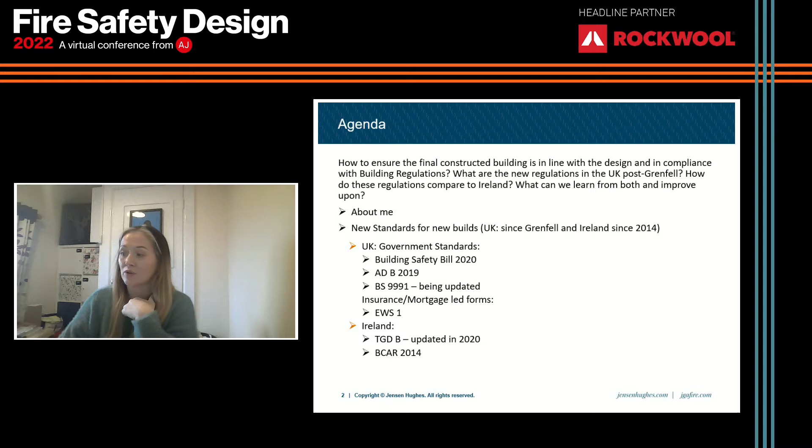So we've had an update to our Technical Guidance Document B. That is basically our ADB, except for a few slight differences throughout. I'll also go through our Building Control Amendment Regulations from 2014.

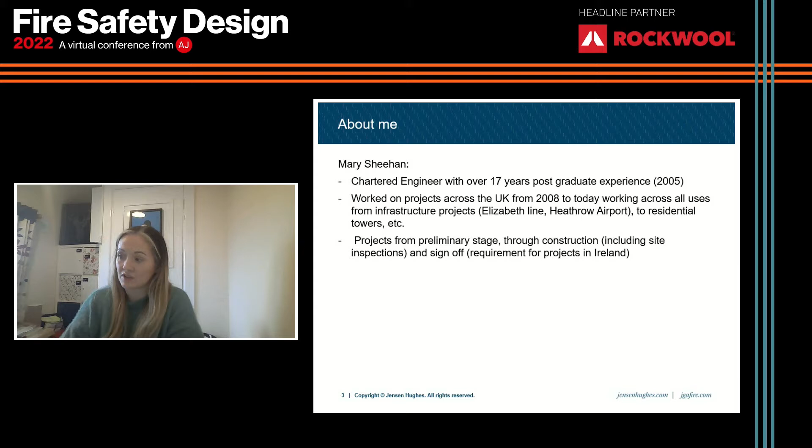A quick bit about me. I'm a chartered engineer with over 17 years postgraduate experience. I worked in the UK from 2008, and still do today, on various uses from infrastructure projects to residential towers. I've done the same in Ireland, the Middle East, and also worked in Rio on their metro for the Olympics. In Ireland, since 2014, there's been a change regarding the roles and responsibilities of fire consultants, which I'll go through, meaning on projects in Ireland you go from the preliminary stage through construction, including site inspections, and have to sign off on compliance.

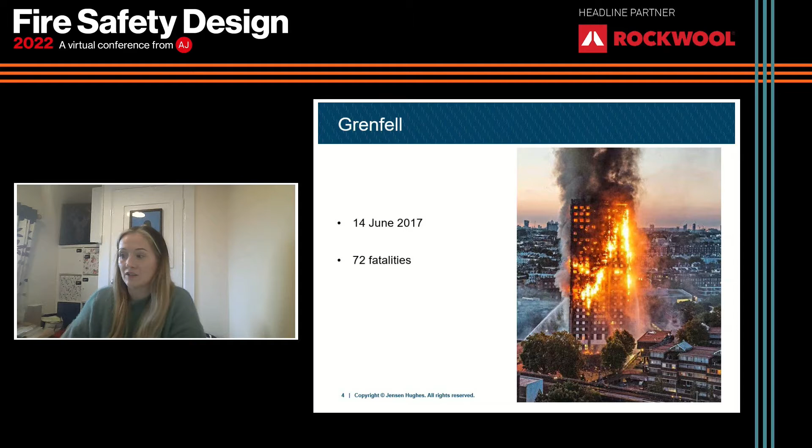As we all know, Grenfell happened on the 14th of June 2017, with 72 fatalities. As a result, the Hackitt Review came out. I'm not going to go through all these slides, but there are a number of main things that came out of it, due to lack of competencies, ignorance, indifference, and so forth. That's kind of led us to where we are now.

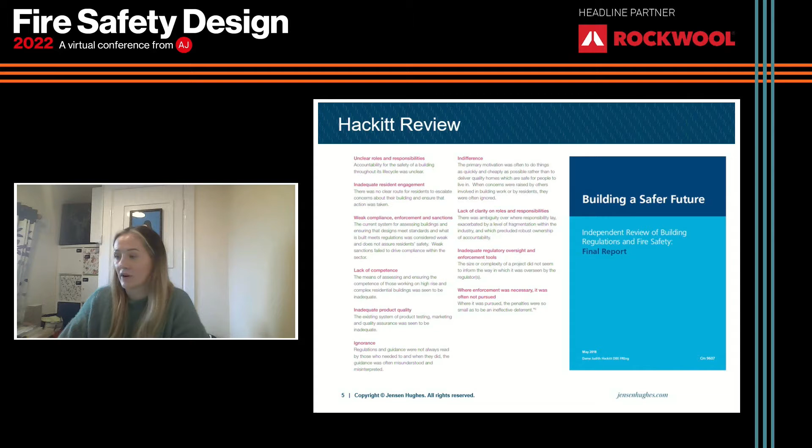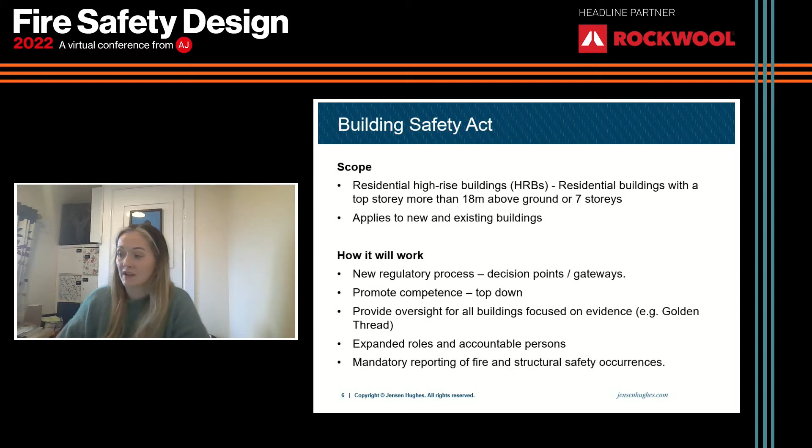So the first thing I'm going to go through is the Building Safety Act. The scope is to do with residential high-rise buildings - residential buildings with a top story more than 18 metres or 7 stories high - and it applies to new and existing buildings. There's a new regulatory process, with distinct decision points and gateways that have to be met. It's there to promote competence from a top-down perspective, provide oversight for all buildings focused on evidence, giving us the golden thread, expanded roles and accountable persons, and mandatory reporting of fire and structural safety occurrences.

It was granted royal assent in April 2022. Gateway 1 is with us now, and deals with the planning stage - the introduction of fire statements within the planning stage, just to ensure fire safety has been considered at that stage. Gateway 2 and 3 are likely towards the end of 2023.

Gateway 2 is before construction can commence. Clients have to submit a building control approval application to the regulator. This includes arrangements to capture and maintain the golden thread information. The regulator has so far spoken about a 12-week period to approve or reject that application.

Gateway 3 is after construction, which is to provide assurance that the building is safe for occupation, and you'll get a completion certificate from the regulator at that stage.

It's interesting to note that the building safety regulator will oversee the building works for high-rise buildings. They'll work closely with the local authority, the fire and rescue authority, and bring in external experts as necessary. It's an interesting point that the way the gateways are set up, it's very yes or no - you can move on from this gateway or you can't. The regulator themselves are taking on a lot of commitments to meet that, and I'm not sure if they're not setting up a serious pinch point within the construction itself.

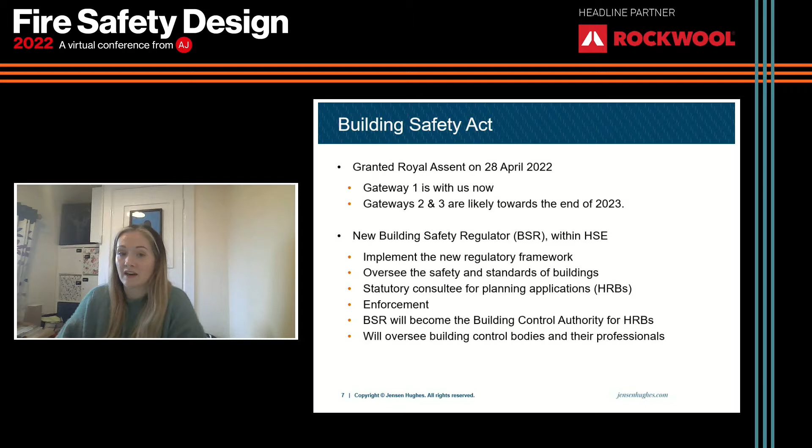If we look at Approved Document B, there's been a number of changes since Grenfell happened, in 2019. There has been changes to the language and content to clarify the recommendations, not the requirements, because they are the same as they always were. The recommendations provide guidance on the design of sprinklers included in an appendix, and further guidance on external stairs. They've moved appendices from the back into the body of the report so it doesn't appear as though they are just a tack-on to Approved Document B.

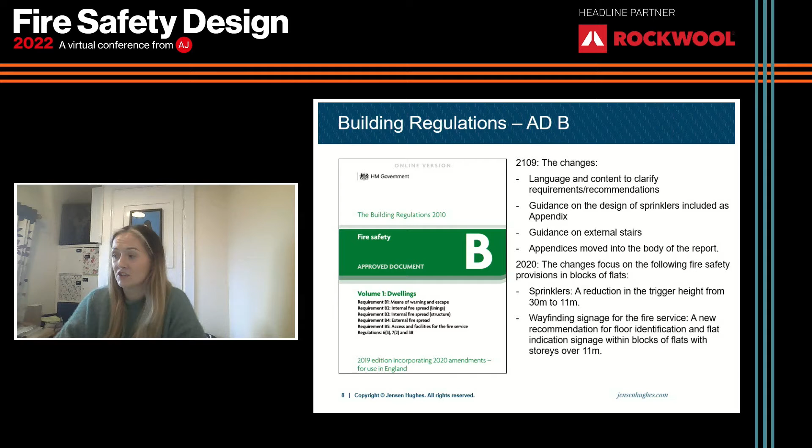Then in 2020, there has been a reduction in the trigger height for sprinklers in blocks of flats from 30 metres to 11 metres. There's also been an introduction of wayfinding signage for the fire services.

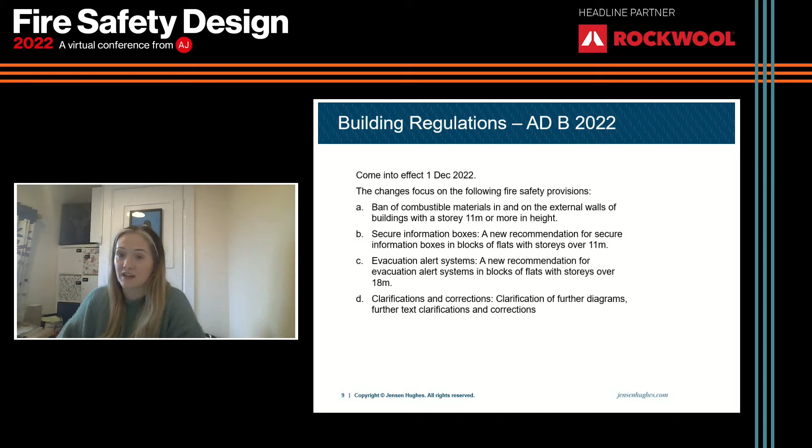In 2022, in December of this year, there'll be further changes, and that is a ban on combustible materials in and on external walls of buildings with a storey of 11 metres or more in height. There'll be an introduction of secure information boxes, evacuation alert systems, and there's also going to be clarification and corrections - that's just to do with diagrams, text clarifications, and that kind of thing.

Other legislation and standards that have come in - we've got the London Plan, which now requires evacuation lifts, and there's an emphasis on the highest possible safety standards. What that means will be interesting and will come out over time, because the building regulations, Approved Document B, and other standards are there to set the minimum required for a building. To add language around the highest possible safety standards when dealing with a contractor and a client trying to achieve a constructed building - I think it'll be interesting to see how that all pans out.

Then we also have the draft BS 9991, which will now require 2 stairs in a building over 18 metres, or pressurisation, evacuation lifts and lobbies, with evacuation lift lobbies being protected from smoke ingress. Again, I've written here 'significant issues' - I don't actually think that's going to be the case. I think with any change, people are always a bit slow to take it on board, whereas between the fire consultants and the M&Es, we should be able to make that work.

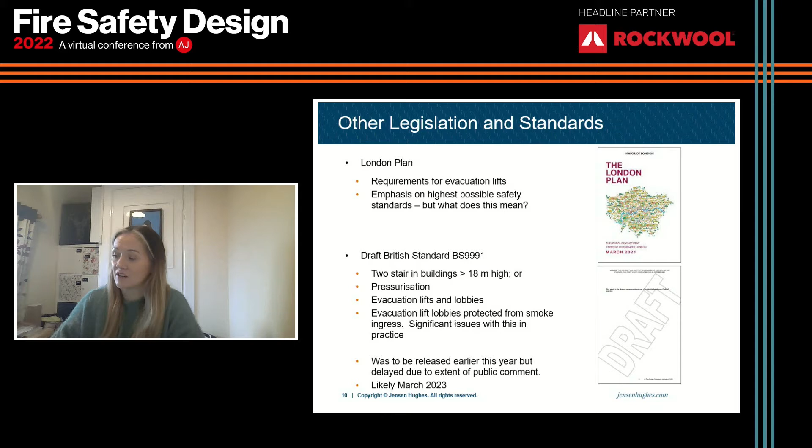It was to be released earlier this year, but it's been delayed due to the extent of public comment. So that's likely to be out in March 2023.

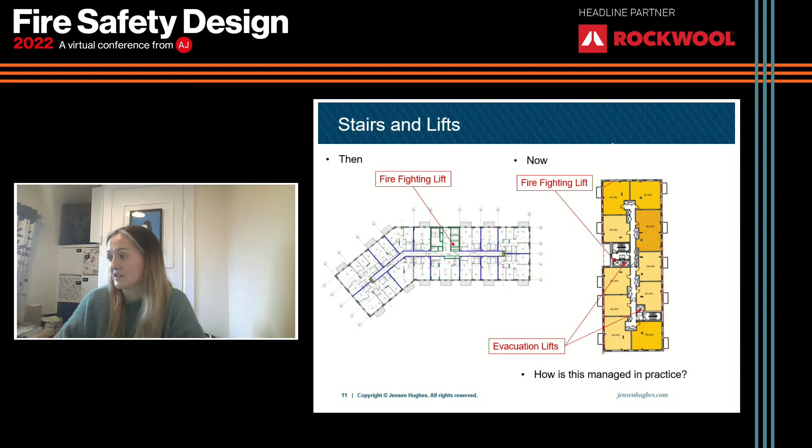It's just a quick sketch to look at what the differences really are from then and now. Within the first one, we have any height building with a single stair, with a single firefighting shaft - you can see it there with the lift. Then once we go over 18 metres, we'll need 2 stairs, 2 evacuation lifts, and a firefighting lift.

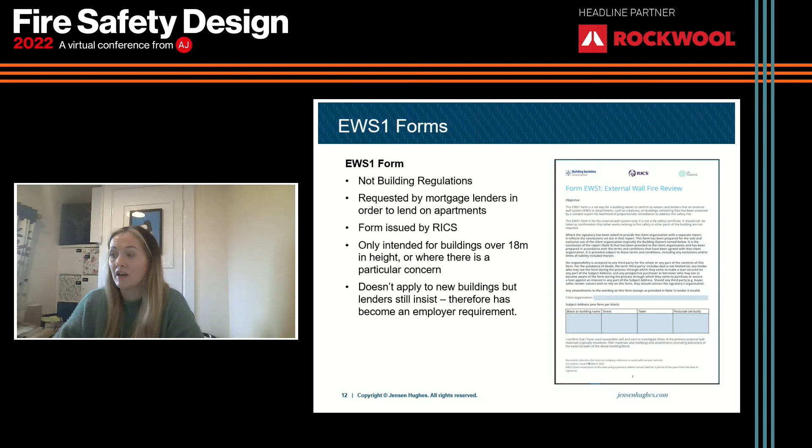Then we also have the EWS1 form. I find these quite an interesting addition because they're not a building regulations requirement - they've been requested by mortgage lenders in order to lend on apartments. They're only intended for buildings over 18 metres in height or where there's particular concern, and it isn't required for new builds. But because of the way lenders have set it up, they've now insisted on it, which means it's now become part of an employer's requirement for all new builds, to ensure they can happily lend money towards it.

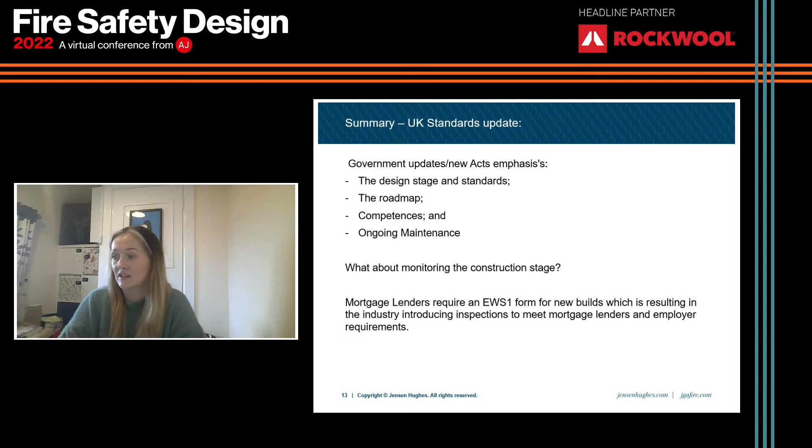So a summary on where I've found the UK standards is that there's an emphasis on the design stage and standards, the roadmap as to where we're going to get to, competencies, and also ongoing maintenance. But again, I'm back to - well, what about the monitoring at the construction stage? Having one regulator having to do all of the inspections on all of the various sites for high-rise buildings - how is that going to work? How is the construction industry going to continue moving? And why haven't we continued to bring along competent fire consultants along the way? As the last note says, as I've already emphasised, the EWS1 form really just puts an emphasis on inspections from the industry rather than from the government.

Our Technical Guidance Document B, the Irish standard, has been updated in line with Approved Document B, and it deals with tall and complex buildings. It deals with open plan flats, it updates that, it updates protected corridors and lobbies, and it updates domestic sprinkler systems. There's an update to firefighting shafts, which is actually different to Approved Document B.

We're moving away from having the stairs, the lift 7.5 metres away, and the lobby, the common corridor, when used as the firefighting lobby. In Ireland now, we'll have the stairs, the lift, and the lobby as a firefighting shaft, and then the common corridor.

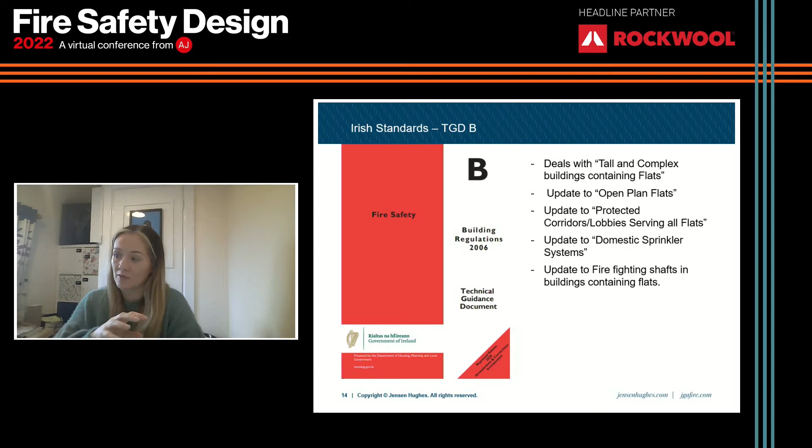So with regard to the new BCAR system, well I say new, 2014 - it was following a number of high profile projects which highlighted shortcuts in the construction industry, mainly to do with residential blocks. The government introduced and amended regulations to try and improve the standard of construction and compliance.

Now we have new roles and responsibilities. At the top we have an assigned certifier, appointed by the building owner, whose role during construction is to develop the inspection plans, coordinate inspections, and certify compliance with the building. Under them there's a suite of ancillary certifiers, including fire engineers, M&Es, access, and all the rest. I'd say the assigned certifiers are generally the architects, with the engineers underneath them.

Each of the ancillary certifiers has to have their own PI insurance to cover the works they are signing off on. And to sign off on any of this, you have to be either a principal or a director of the company. So the fire consultants, as I was saying, have now become ancillary certifiers, which include inspection roles.

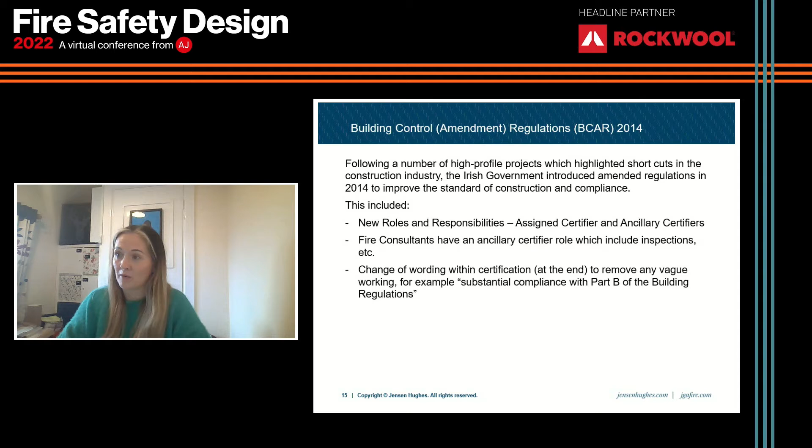What has also happened is they've removed the vague wording. So within the opinion on compliance that we had to provide before 2014, it would state things like 'substantial compliance with Part B.' They've removed any woolly words with regard to that - it's now to do with it complies with Part B of the building regulations.

We have also introduced a way of monitoring and managing the information. With the system in the UK, you have to ensure all the paperwork is correct, and that all feeds into the golden thread. We have a different idea - the Building Control Management System, where all of our information is put up there, and it's an online management system, managed and monitored by the local authority.

It seems similar to the role of the Building Safety Regulator, only ours applies to all buildings - we haven't just stuck to high-rise residential or high-risk buildings. We have this throughout all buildings and new builds.

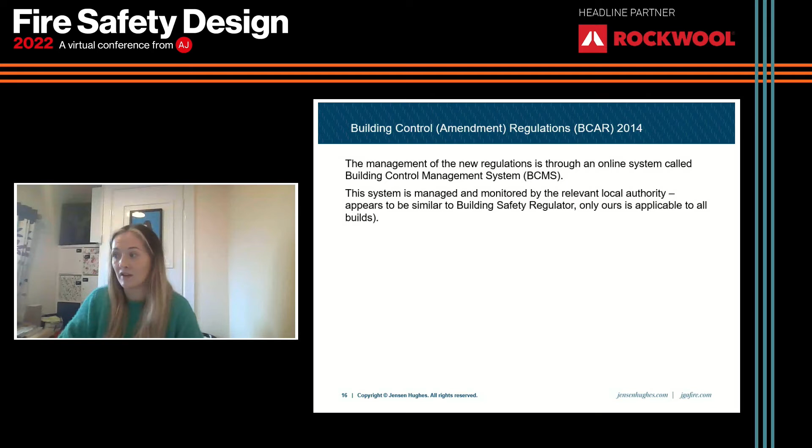Our local authority has more of a monitoring role, so the fire consultant will be going out and doing inspections at the various stages and benchmarks, and they will do the final sign-off, while our building control monitors - they go to site to ensure that things are being undertaken correctly.

So what does that mean for fire consultants in Ireland? As I was saying, the role now includes the ancillary certifier role. We have to provide a certificate at the start, before construction, to state that the design complies with the second schedule of the building regulations - to show that it complies with Part B of the building regs.

We have to undertake an inspection plan, ensuring the key stages will be inspected - that's all of the benchmarks. So we're talking about when the external walls are going up, the cavity barriers, fire stopping coming through the firewall, the external walls, the fire stopping in the common areas within the protected entrance halls. We have benchmarks for all of those, which helps the QA on site with the contractors.

So you'll be calling out when something hasn't been fitted correctly, and a contractor's representative will be there to ensure that what you've picked up has been addressed throughout. You're there for all the benchmarks, and after that you'll be there for inspections throughout as well, to ensure everything is as compliant as can be. You're never going to see 100% of the building - that's obviously a shortcoming - but at least there are the benchmarks and the sporadic inspections. You also have to produce inspection reports.

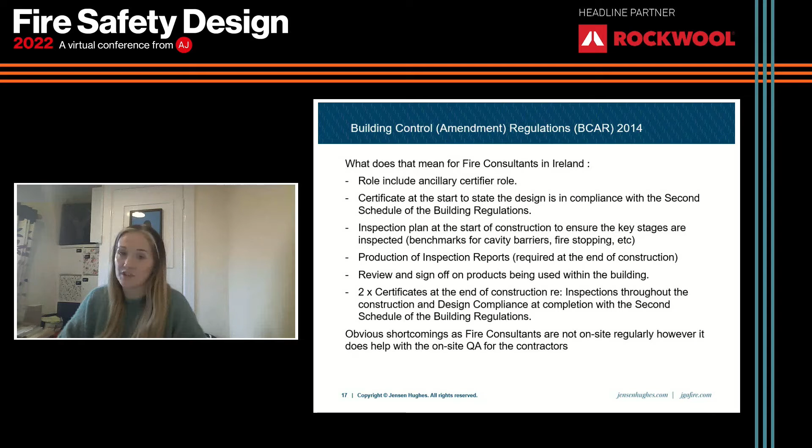Obviously no system is absolutely perfect, but this allows for an awful lot of benchmarking. The fire consultant who has been involved in the fire strategy or fire certificate in Ireland throughout the entire stages, and is well aware of what's going on, can do all the regular inspections. It can keep construction continuing, but also allow the Building Control Authority to carry out their own inspections.

And we now have a move to more high-rise developments in Ireland, in Dublin and in Cork. So we're going to have to implement the learning and the design standards that have been introduced, which we've spoken through, from Grenfell.

What I've found with regard to the UK is that they could learn a bit from what Ireland does very well, which is having competent fire consultants. Get them involved, make it their responsibility that they have to be insured and have to sign off on the buildings as constructed to Technical Guidance Document B or the building regs. That keeps the construction industry going, and it allows the Building Control Authority to monitor and have management of the system. You have to provide all of those certifications before the building can be occupied. So I think there's perhaps a bit of a learning in that for the UK.

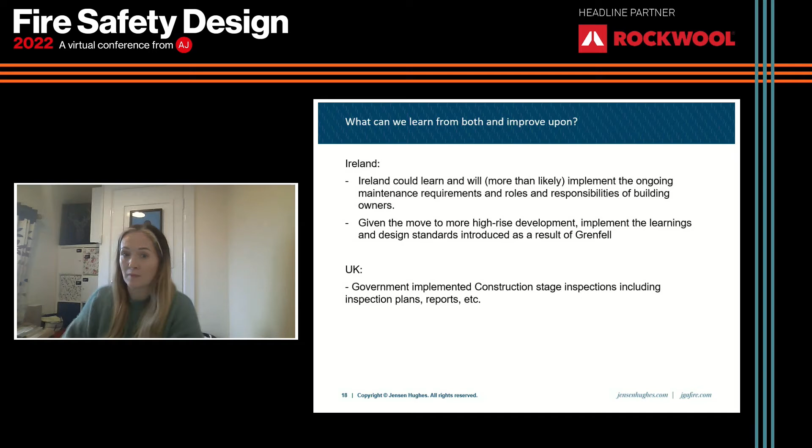And that - any questions from yourself, Paul?

Well look at that, I asked Mary if she could be sure to finish on time, and Mary, you're 7 seconds over, so that's about as good as it gets. Well done. I don't know whether you know the format, Mary, but we've got questions rolling in and we've got a chat line going as well. I'm not looking at the chat line because it's very interesting but I haven't got the time as I'm dealing with the questions. But there's a very interesting chat dialogue going on, I'm assured by others in this studio with me, and also the questions are rolling in.

I'm going to shape a few of those up now in the 15 minutes we've got. But the talking points around this one are how to ensure the final constructed building is in line with the design and in compliance with the building regulations. And that takes us on from this morning very well. What are the new regulations in the UK post-Grenfell, and how do these compare to Ireland? What can we learn from both? We've touched on the latter of those two questions, but the first one is very important.

Let me turn straight to one of the questions that's come in, and I think I'm going to dive in with this one. I was going to leave it till later because it opens a Pandora's box, but let's go with it. It's Andrew Fern again, he has a question this morning. He says, do you feel, Mary, that the design and build procurement route in its current form - indicating that change may be needed or is coming - is compatible with the Building Safety Act? I think what's behind that is that the Building Safety Act places stringent demands on all involved in the process of delivering buildings of a certain level of complexity, scale and size.